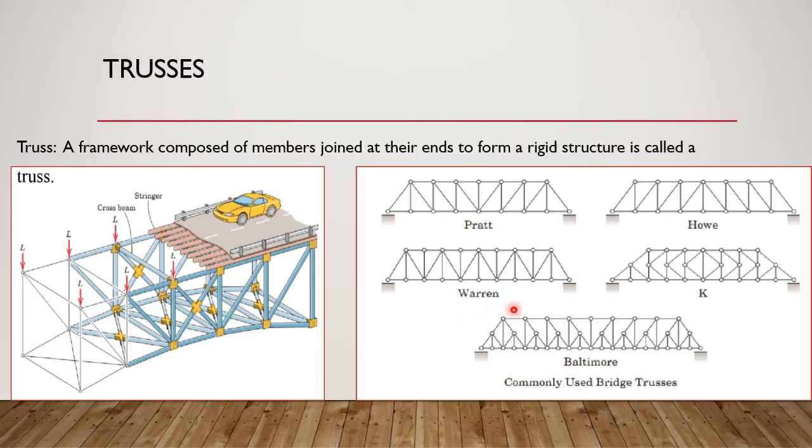Ngayon, dalawang bagay ang kadalasan pinaggagamitan ng truss. Una sa mga bridges. Ayan, kung makikita natin yung mga ganito, ang tawag daw dyan, Pratt truss. Ito raw yung mga commonly used trusses sa mga bridge. Ito naman yung Howe truss. Tapos meron tayong Warren truss. Ito yung common sa mga bridge. K-truss. Tapos Baltimore. Pagdating naman natin sa mga roof trusses, meron tayong mga

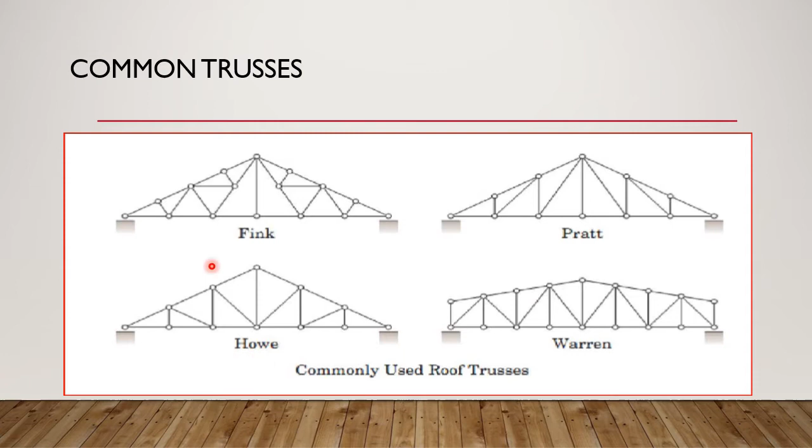commonly used roof trusses, which is the Fink truss. Ito itsura nun. Pratt truss. So, ganito naman itsura nun. Warren truss and Howe roof truss. Yan yung mga itsura naman sa mga common trusses natin.

Ano raw yung mga features or kadalasan na features ng mga trusses? There are structural members commonly used are I-beams, channels, and angles. Tapos, ideal truss members are fastened together at their ends by pin connections. Ito yung sinasabi ko kanina. Although sa actual, ginagawa natin dyan lalo na sa panahon ngayon, welded or riveted connection. Pero kadalasan ngayon, welded na.

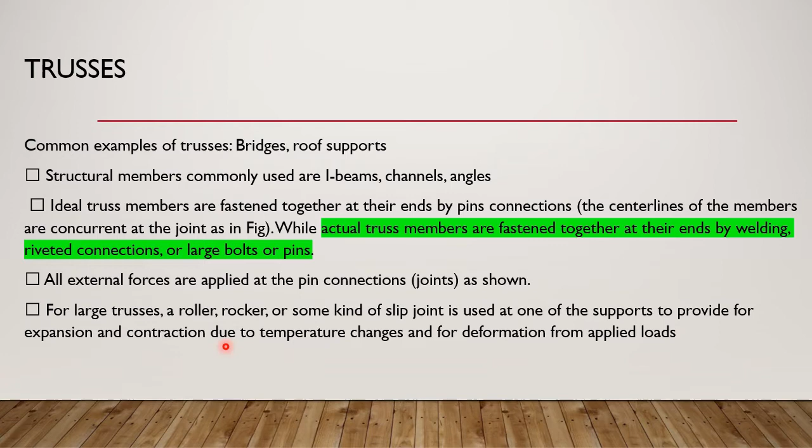Pero sa ideal or sa computation, we also compute that as pin connected. All external forces are applied at the pin connection joint as shown. For a large truss, a roller, rocker, or some kind of slip joint is used at one of the supports to provide for expansion and contraction due to temperature changes and for deformation due to applied loads.

Dalawa raw yung method ng analysis ng truss. Una, yung method of joints, yun yung pag-aaralan natin dito sa video ito. Tapos susunod na video, magbibigay tayong example sa method of section.

For example, we have this truss, which is A, B, C, D, E, F. Okay, and we have a load L. Yung joint method, paano daw natin ginagawa yun? This method for finding the forces in the members of truss consists of satisfying the conditions of equilibrium for the forces acting on the connecting pin on each joint. The method therefore deals with the equilibrium of concurrent forces. So, ang mga forces na nag-act sa truss ay concurrent kasi they meet at one single joint.

Katulad nito, concurrent yung AF, BF, tsaka FE. So, summation of forces at X is equal to 0 and summation of forces at Y is also equal to 0. We can apply this condition of equilibrium to solve for the members, the forces at the members.

Ano yung unang step natin? Draw the free body diagram for the truss. Then calculate reactions R1 and R2. Use summation of moments at A so you can get the reaction at D, and summation of moment at D, you can get the reaction at A. And then you can also use summation of forces at Y for the whole truss.

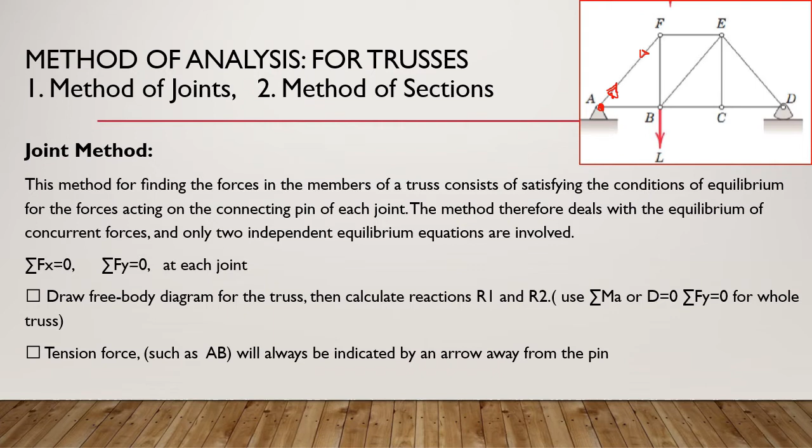So yan daw yung ating susunod na gagawin. O yun daw namang mga compression force such as AF, halimbawa, ano ba yung AF natin to? Ayun. Kung yung AF daw ay compression, that is towards the pin. Yun yung sinasabi. Kung compression to, towards the pin din, parehas.

Okay, pangatlo, draw the free body diagram for each joint. O kagaya ng ginagawa dito, dinodraw niya yung mga free body diagram at each joint. Katulad dito, joint A, anong makikita natin? Makikita natin yung AB, AF, and reaction. Ngayon, it is just okay to assume kung saan yung direction natin.

Magmamanifest yan kapag lumabas sa computation natin negative, ibig sabihin yung assumption mo ng direction, mali, kailangan mong baliktarin. Halimbawa, kunwari naging negative, buburahin mo yan, sa halip na compression, gagawin mo ngayong tension, away from the pin. Malalaman mo yan doon sa computation mo kapag sa reaction mo, nag-negative. Pagka sa computation mo nag-negative yung isang member, yung assumption ay mali.

Ngayon, ang ginagawa ng iba, ito personal tip ko sa inyo, kasi iba-iba tayo ng paraan ng pagsosolve kung saan kayo madalian. Papakita ko sa inyong lahat kung saan kayo madadalian. Ang ginagawa ng iba, lahat ito, nilalagyan nyo na kaagad ng predetermined na or assumption na, isa-isa. At ginagawa niya lahat yan, tension. May makikita kayong book na ganyan ng kanyang instruction, gawing tension lahat, ibig sabihin, away from the pin, lahat assumption na ganyan, away from the pin, and then tsaka na lang aayusin kapag nag-negative. Isang bagay yan, pero nakakalito yan para sa akin.

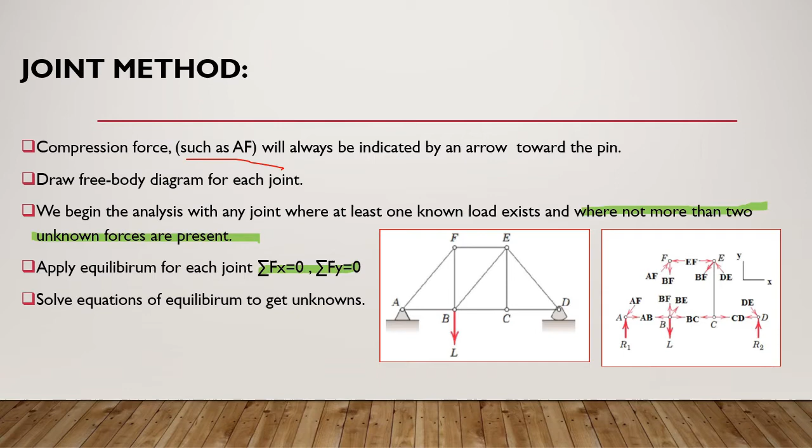Isa-isa natin solve summation of forces. Pagkatapos, pag may nasolve ka, itatransfer mo yun dun sa kabila. So actually, ito yung paborito ng mga estudyante pagdating sa statics. Ito yung mga kauna-unahang topic na dinidiscuss pagdating sa statics.

Now, it is often convenient to indicate the tension T and compression C of the various members. Kapag daw natagpuan natin na isang member ay under tension, lagay daw natin sa sagot tension para hindi magulo. Tapos lagay natin compression para maging reference natin siya sa susunod na joint. Sometimes we cannot initially assign the correct direction of one or both of the unknown forces. Ito yung sinasabi ko kanina. Kapag naglagay ka ng assumption at hindi tama yung assumption mo, a negative computed force value indicates that the initially assumed direction is incorrect. Wala namang problema yon. The magnitude is correct but the direction is the opposite. So kung i-assign mo siya as compression at nag-negative siya, gagawin mo lang tension, ano?

Okay, now here, when two collinear members are under compression, as indicated in this figure, ito yung figure natin. Kung makikita nyo, compression dito, ano ang tendency niyan? Magbabuckle. Ano ba yung buckling? Yun yung magbe-bend under pressure. So parang mabibilog siya, mag-bend siya.

It is necessary to add a third member, itong member na to maintain alignment of the two members and prevent buckling. Ayun, yung sinasabi ko kanina. The third member will prevent the buckling. We see from a force summation in the y direction that the force F3 in the third member must be 0, and from the x direction, F1 is equal to F2. So yung F1 is equal to F2. Ngayon, itong F3, third member must be 0 from the y direction. If an external force with a component in the y direction were applied to a joint, then F3 would no longer be 0. Okay, so yan yung mga key takeaways natin.

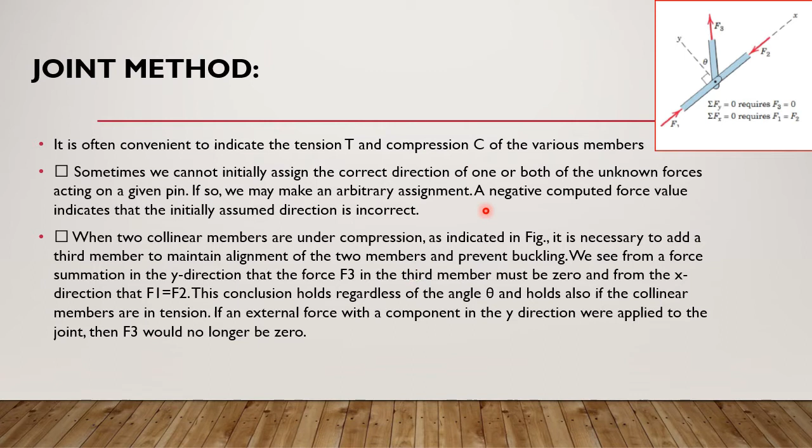Mamaya sa ating pag-aaral, malalaman natin yan as we go along. Okay, we have this sample problem. Compute the force in each member of the loaded cantilever truss by the method of joints. So ito yung truss na binigay sa atin. Tapos ang support niya nandito, no? So dito meron siyang support at dito meron din siyang support. So pag-aaralan natin kung paano natin solve dyan mamaya using free body diagram.

Ngayon, ano ang key takeaways natin dito? Tandaan mo ito, 5 meters, 5 meters, 5 meters. So kapag ka 5 meters, 5 meters, 5 meters siya, anong tawag sa kanya? Ang tawag sa kanya equilateral triangle. So kapag ka equilateral yung triangle, edi yung angle niya riyan equal din, ano?

Equiangular triangle - so what happens to the angles here? Remember in trigonometry, the sum of the interior angles of a triangle is equal to 180. If they're all equal, 180 divided by 3 gives us 60 degrees.

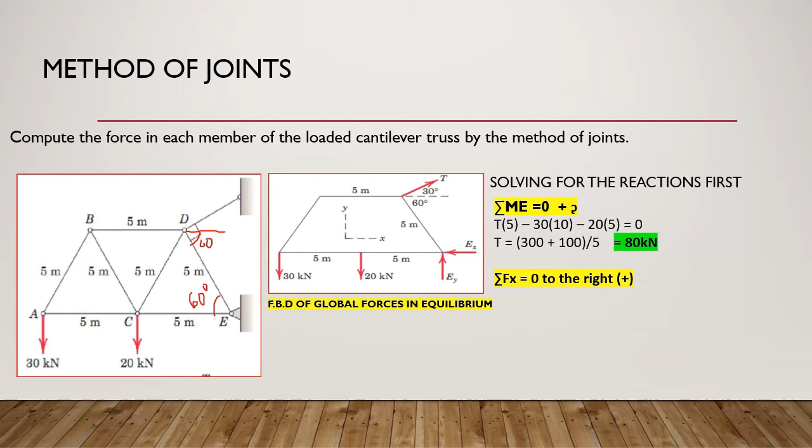Summation of forces at x is equal to 0, to the right positive. What are the forces acting to the right? The forces acting to the right - this tension will have T sub x and T sub y. That's T cosine 30, where does that come from?

Let's show that this will have T sub x, and this also has T sub y, upward. Wait, let's erase this. We will have here T sub y pointing upward. Let's just say upward for representation. Therefore, T cosine of 30 - why cosine?

Because it's adjacent to the 30 degree angle. That's T sub x. What will be the direction? To the right. So this is positive minus E sub x, is equal to 0.

So what is T cosine of 30? 80 cosine 30 is equal to 69.2820 kilonewton. What does that mean? E sub x is to the left. Now here's what I was saying - this came out positive, and your assumption was that it's to the left, so it is indeed to the left.

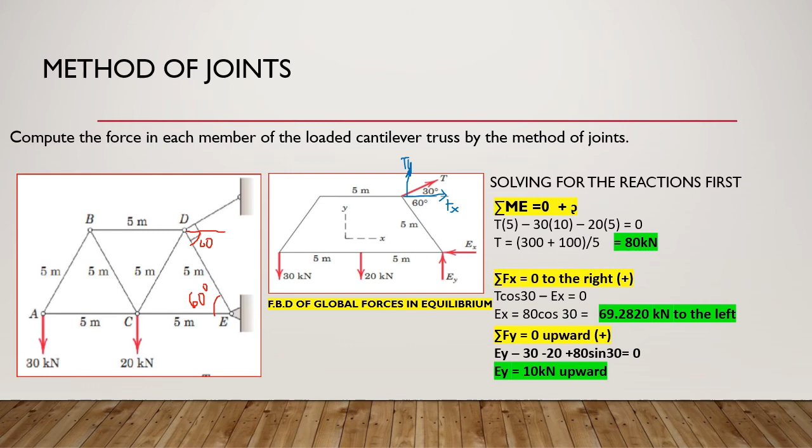Okay, hopefully that's clear. Now we want to solve for E sub y. Summation of forces at y is equal to 0, upward positive. E sub y minus 30 minus 20 plus 80 sine of 30 is equal to 0. Therefore, E sub y is equal to 10 kilonewton upward.

Okay, after getting the reaction, we are now going to proceed with the method of joints. We are going to choose a joint. I chose joint A. Why joint A? Because only two or three forces are acting on joint A, and one of them is already known, that's the load. So with two members and one force, we can easily solve for the members.

Let's remember, this member AB is an inclined force, so we can resolve that into its components, which are ABY here, and we'll also have ABX here. So this one is ABX.

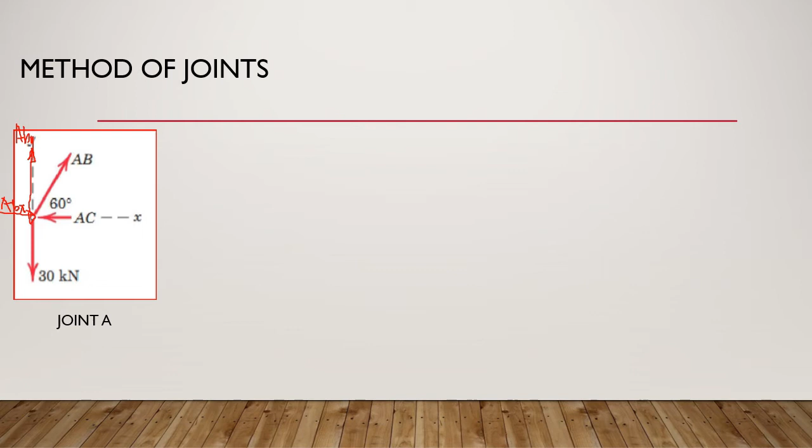Okay, therefore we are now ready to solve the problem. Summation of forces at Y is equal to 0, upward to be positive. What are the forces acting upward? We can see ABY. But what is ABY? AB sine of theta, because that is opposite of this angle. So AB sine of 60 minus 30, and that will be equal to 0. AB sine 60 minus 30 is equal to 0.

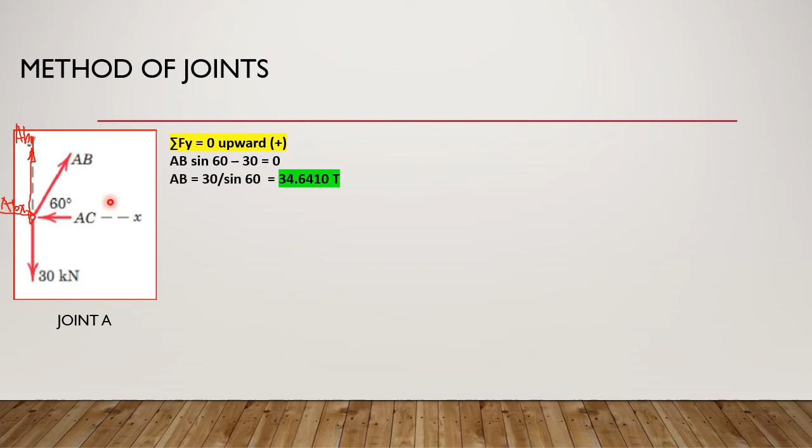Okay, now we sum up forces at X and equate that to 0. What are the forces acting to the right? To the right will be positive, therefore AB cosine 60 minus AC. Therefore, summation of forces at X is equal to 0. To the right positive, we have AB cosine 60 minus AC is equal to 0.

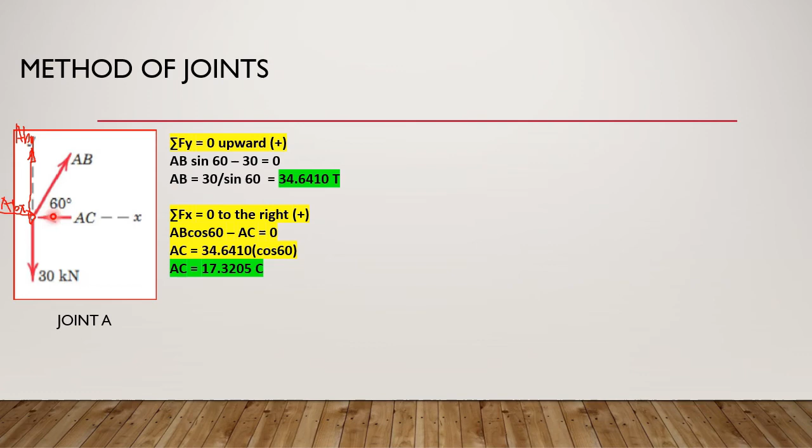17.3205, and that will be in compression. It's compression because it's towards the joint. When tension, it's away from the joint. This has been repeated three times already. Compression is toward the joint, tension is away from the joint. It's positive, so our assumption that it's compression is correct. If it's compression here, later at C we'll also assume it's compression.

Next, let's move to another joint. So we go to joint B, at the upper part of it. And we get a free body diagram. We see this AB, it's tension, right? So now for AB here, let's assume it's tension, away from this joint, because we can't assume it's compression going upward like that—that assumption would be wrong. We already proved that it is indeed tension. And then let us assume BD to be tension, and BC compression towards the joint. So these two are assumptions, but this one we are very definite on.

Therefore, we sum up forces and say at joint B, summation of forces at Y is equal to 0, upward to be positive. What we have will be BC, this BC sub Y. But what is BC sub Y? That is BC sine 60 minus AB sine 60. The Y components are all sine, because what's given to us is the X. Therefore, BC sine 60 minus AB sine 60 is equal to 0.

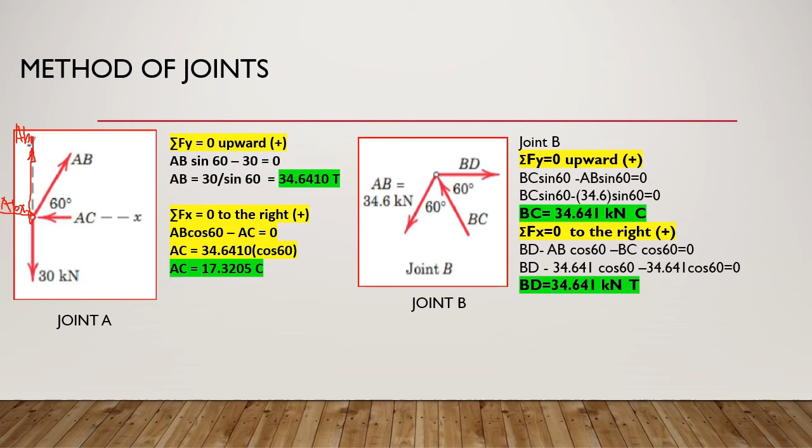Okay, we will now proceed to another joint, which is joint C. Sa joint C, may 5 forces na nandyan. At yung tatlo sa mga forces na nandyan ay known na natin. Yung isa given, ito ay given, ito ay na-solve na natin. Tama na yung mga direction niya. So we will assume CD to be tension and CE to be compression.

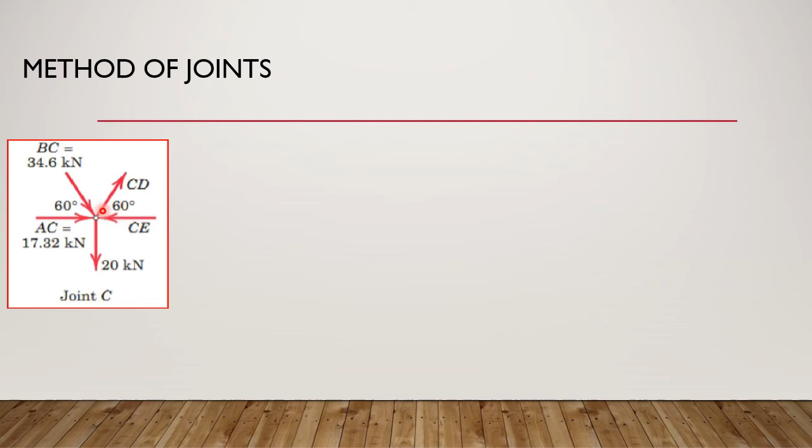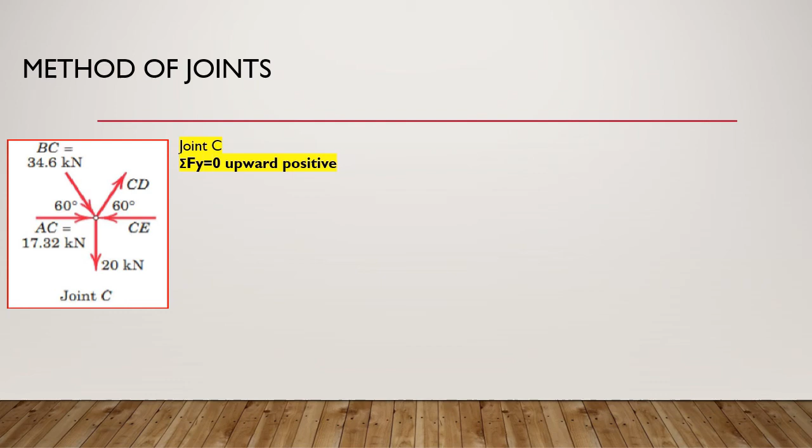And we sum up forces vertical to solve for CD, sum up forces horizontal to solve for CE. At joint C, summation of forces at Y is equal to 0, upward positive. Tandaan mo kung concurrent forces naman yan, kung current siya sa C. Therefore, what are the forces acting upward? Isa lang yung force na nag-act upward, that will be CD sine 60.

O tapos minus BC sine 60 minus 20. Ito yung 20 yun. Therefore, CD sine 60 minus 34.641 sine 60 minus 20, ang kwentada raw dyan ay 57.7350 kN. Ngayon, lumabas na positive itong ating sagot. Therefore, yung assumption natin na tension siya is correct. Ngayon, kapag ka-tension siya dito, tension na rin siya sa kabila. So, paulit-ulit tayo doon. If your answer becomes positive, your assumption is correct, no need to reverse the sign or no need to reverse the direction.

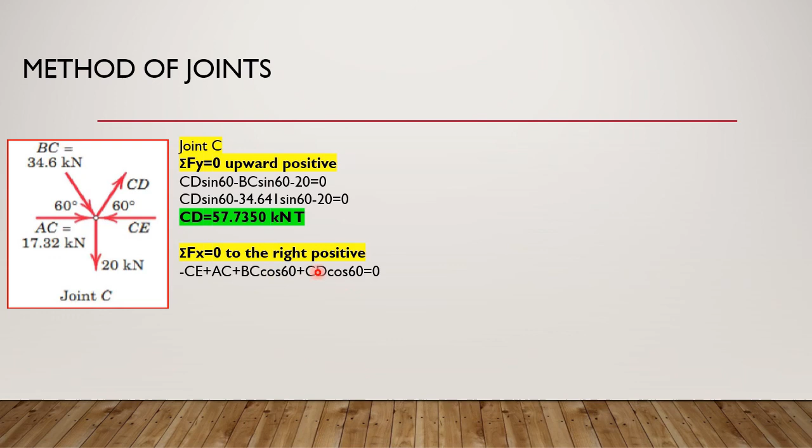Okay, we solve for CE now. Summation of forces at X is equal to 0, to the right positive. Therefore, we have, what are the forces acting to the right? There are actually 3 forces acting to the right: AC, BC cosine 60, and CD cosine 60 are all acting to the right. Kalaban niya itong si CE acting to the left. Therefore, we have negative CE plus AC plus BC cosine 60 plus CD cosine 60 is equal to 0.

Rearranging things, we have CE minus 17.3205 minus 34.641 cosine 60 minus 57.7350 cosine 60 is equal to 0. And computing values, we got CE as 63.5085 kilonewton. We assume that CE is towards the joint or compression. Therefore, compression yung ating CE.

Okay, we go now to another joint, which is the last joint. Sa last joint E, kung mapapansin mo sa joint E, wala na tayong unknown kung hindi isa na lang, itong DE na lang. Kasi yung CE naman, nakita natin dito, compression siya. Therefore, i-assume natin na compression pa rin siya pagdating sa joint E. Once compression, always compression. Once tension, always tension. Yan po yung kasabihan natin dyan. Huwag mong i-assume dito na palayo yan dahil napatunayan mo na naman ito na papunta sa pin. So, this is a compression member kung tawagin natin.

Therefore, we sum up forces vertical. Yun na lang ang makikita natin. Let us do that. At joint E, summation of forces at y is equal to 0 upward positive, we've got negative DE sine 60, sine dahil opposite that angle, plus 10. Bakit plus 10? That is upward. Therefore, na-compute natin siya na that will be positive 11.5470 kilonewton, at yung assumption natin tama na naman na siya ay pababa. So, compression going toward the joint.

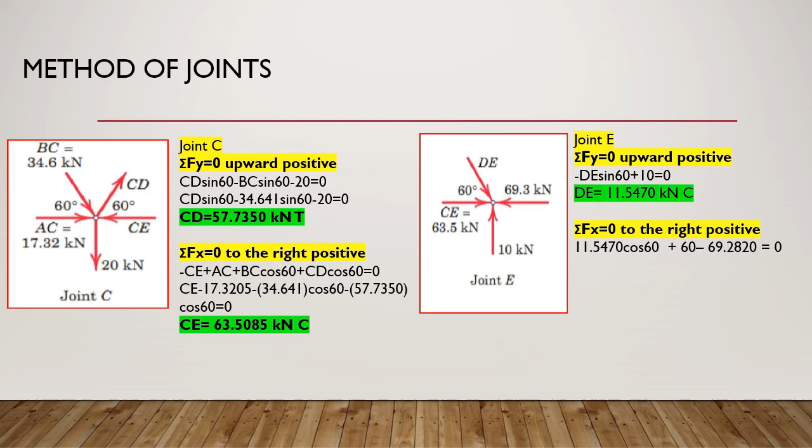So yan, ganyan, na-solve na po natin yung ating method of joint. We have computed for all the members. Ganun lang, magsisimula tayo sa joint kung saan dalawa lang yung unknown. Pagkatapos i-transfer natin yung joint analysis natin, ma-resolve natin yung mga members. Lagi lang natin tatandaan na dalawa lang ang gagamitin natin dito, summation of forces at x and summation of forces of y. Yung summation of moments, doon lang natin gagamitin kapag kumukuha tayo ng reaction sa global equilibrium noong trusses. Kadalasan po ng trusses, simply supported, isang roller at isang hinge sa magkabilang dulo.

So, yun po yung mga key takeaways natin. At kapag given yung mga angles, edi madali natin masosolve. Kung kagaya dito, equilateral triangle, alam natin na 60 degrees yung angle. So, kailangan natin dito ng solid knowledge sa geometry, trigonometry, physics na rin. So, these are the key takeaways, and see you next video.

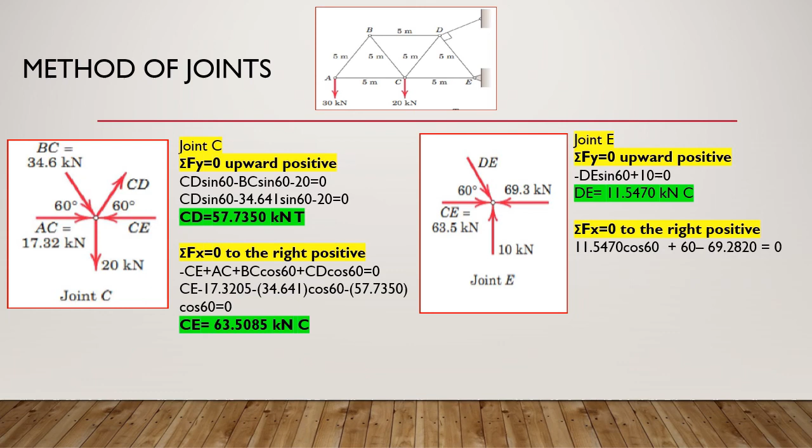Now for your practice and exercise, kindly consider the truss given below and determine the force in each member of the loaded truss.